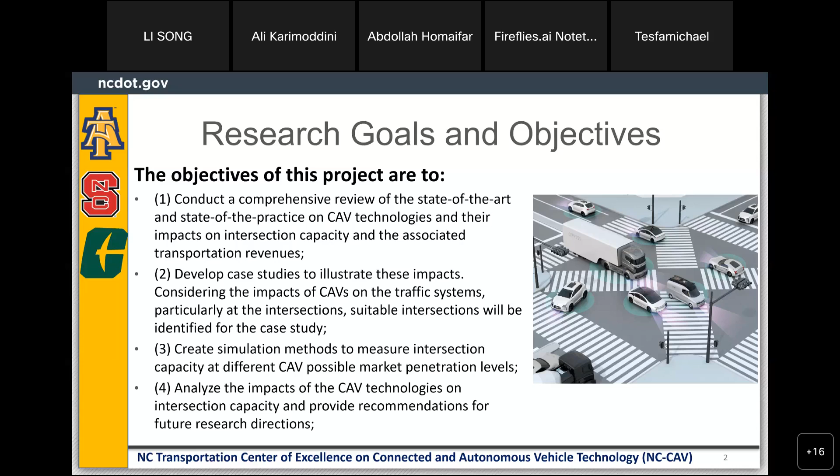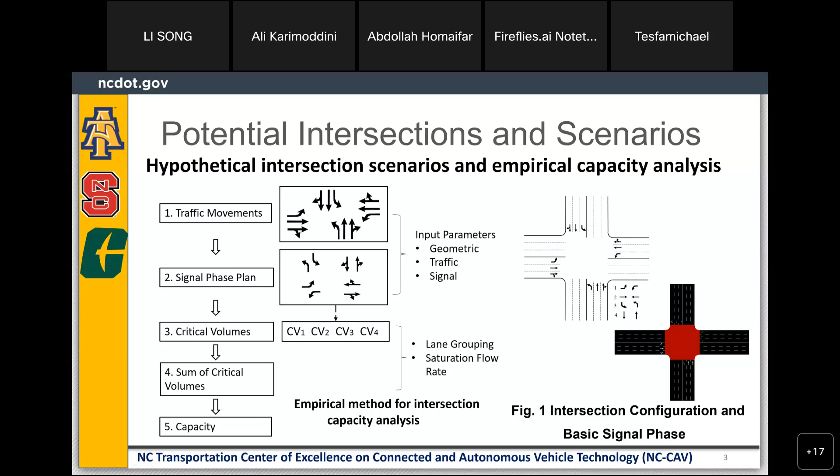And the right figure illustrates the layout for the intersection configuration and the basic signal phase for the simulation intersection. Based on the capacity analysis method, we can calculate a pre-timed signal scheme for that intersection, and based on that signal scheme, we can calculate the intersection capacity for the hypothetical isolated intersection, which is around 5,592 vehicles per hour. And this value is set as a baseline for simulation.

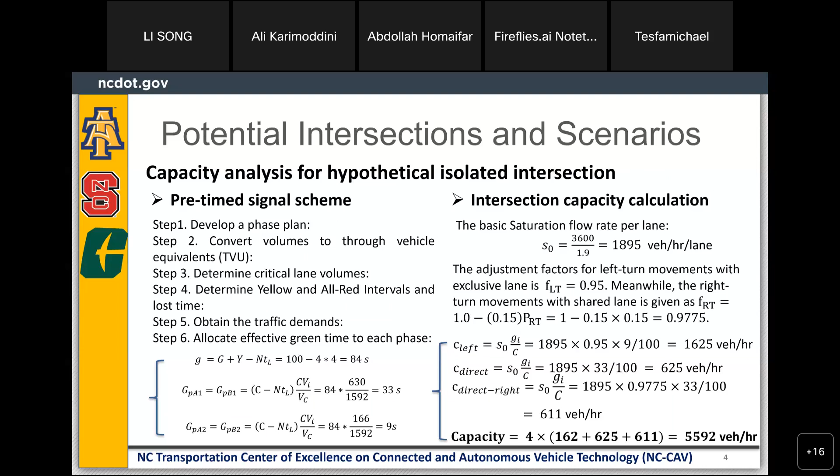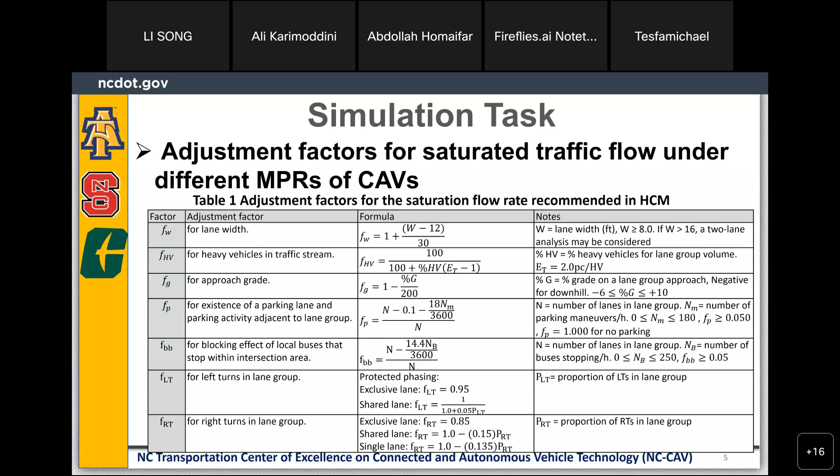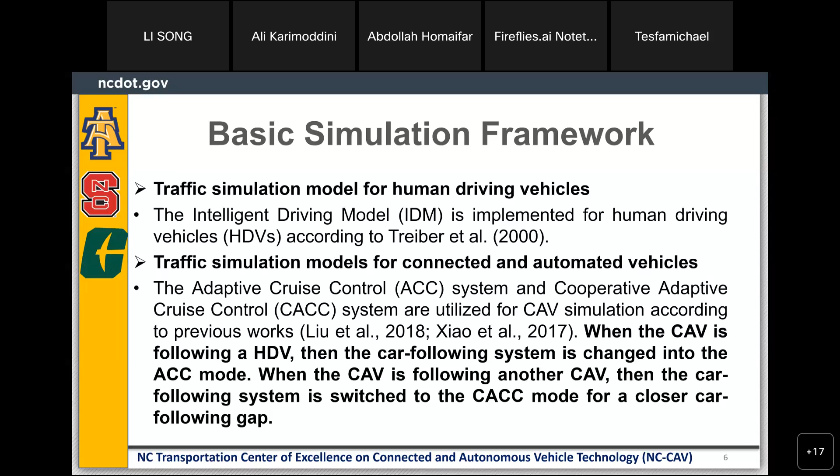In this research, when a CAV is following a human driving vehicle, the car following system is changed into ACC mode. When the CAV is following another CAV, the car following system is switched into CACC mode for a closer car following gap behavior. The basic parameters for the specific traffic simulation models are as follows. The desired time gaps are set as 1.9 seconds for human driven vehicles and 0.6 seconds for CAVs. And we set 1.1 seconds for CAVs with the ACC system, which means the CAV has no front vehicle within the sensor range.

To model heterogeneous driving behaviors of human drivers, the maximum speed for human driven vehicles follows a normal distribution with respect to the speed limit. Other parameters for CACC controlled CAVs are set according to previous research, especially UC Berkeley's PATH program. The default lane change model LC2013 in SUMO is employed for all vehicles. And Table 2 illustrates the basic parameters, including the acceleration, deceleration, desired time gaps, speed deviations, and minimum following gaps for different kinds of vehicles.

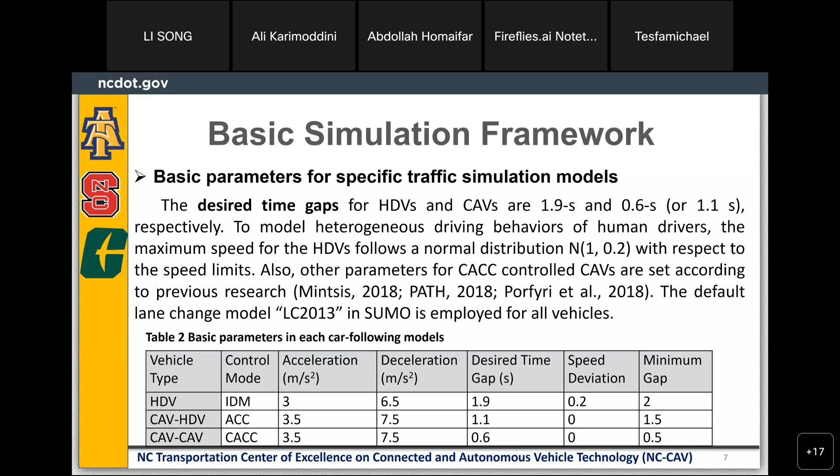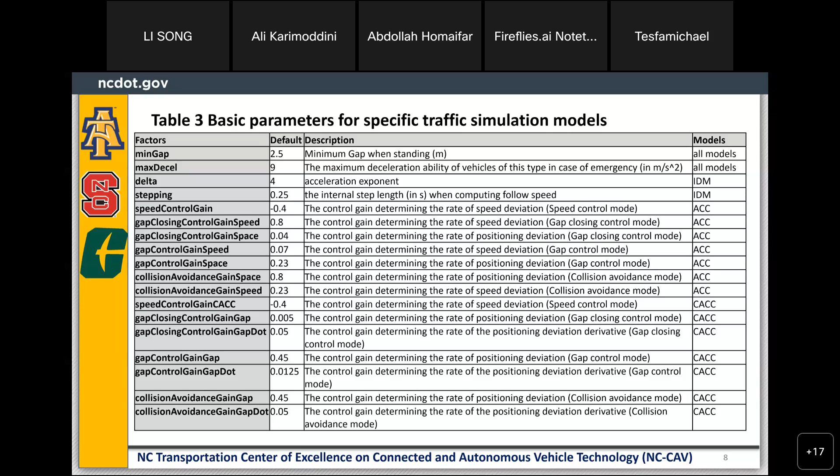With the baseline settings for simulations, we also create specific scenarios for the simulation. The first one is for the lane group level analysis. As defined in the Highway Capacity Manual, the saturation headway is the average headway between the 5th and the 15th passenger vehicles in a standing queue when the intersection signal changes from red to green. The first 4 headways are not included due to the start-up lost time.

The headway is calculated by the time gap between 2 successive vehicles, meaning the front bumpers of the vehicles passing over the stop line, which is illustrated in the left figure. And we can also calculate the saturation headway considering the start-up lost time, which is illustrated in the right figure.

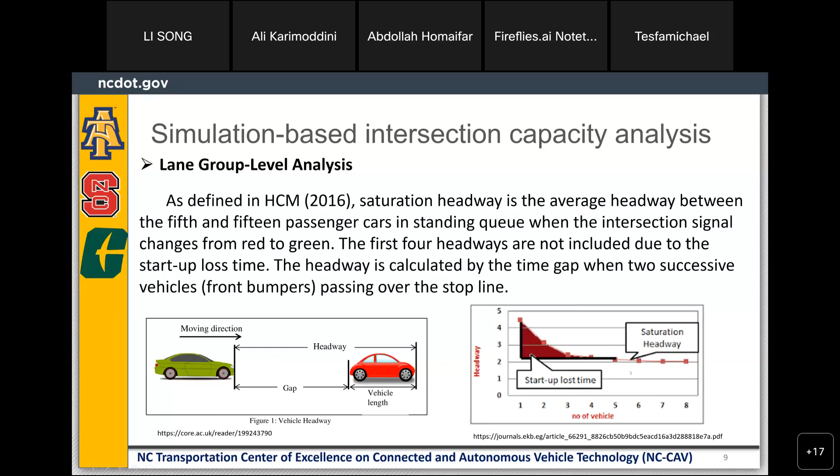With the baseline settings for the simulation scenarios, we can first calculate the saturation headways for each lane group at the intersection during the simulation. Table 4 illustrates saturation headways for each lane group, where we can observe different saturation headways under different market penetration rates of CAVs. For example, for the exclusive through traffic lane, we can observe a decrease in the saturation headways with the increase of the market penetration rate of CAVs.

Also, for CAVs with the ACC or CACC mode, we can calculate the gap based on the right formula, and we can also calculate the gap for human-driven vehicles in the IDM mode based on the right figure.

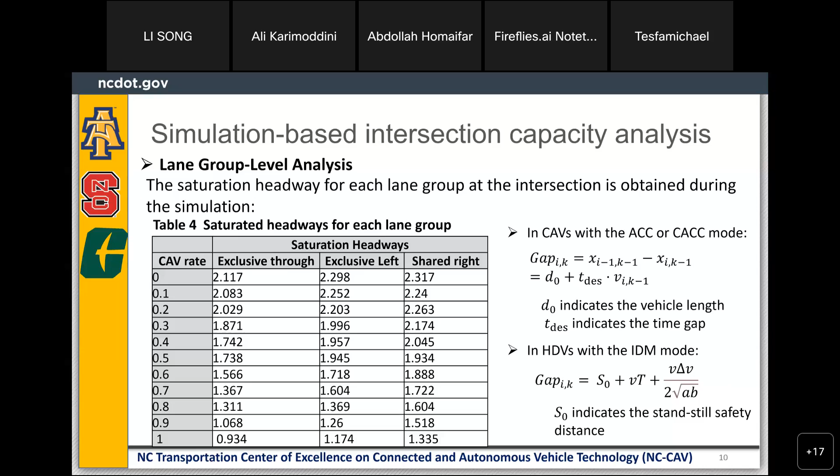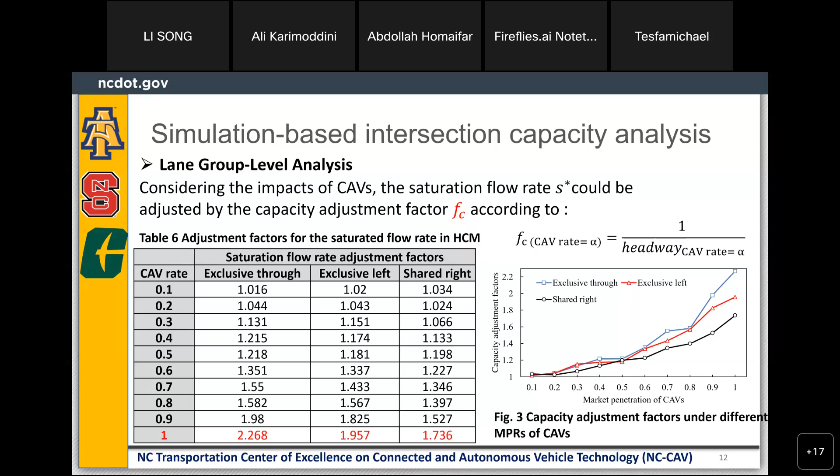The tendency of the capacity adjustment factors for the exclusive through, exclusive left, and shared right turn lanes is observed in Figure 3. After calculating the adjustment factors for the specific lanes, we can also do an intersection level analysis, which means that we calculate the adjustment factor for the whole intersection.

The simulation maximum throughput, which is identified as the maximum capacity of that isolated intersection, is obtained with the increase of the traffic demand under different market penetration rates of CAVs. This means that with the increase of the traffic demand, in the simulation we can observe a steady increase in the throughput at first.

After a certain volume, we can observe the saturated traffic at that intersection, and that maximum volume is set as the maximum throughput, which is also identified as the capacity of that intersection.

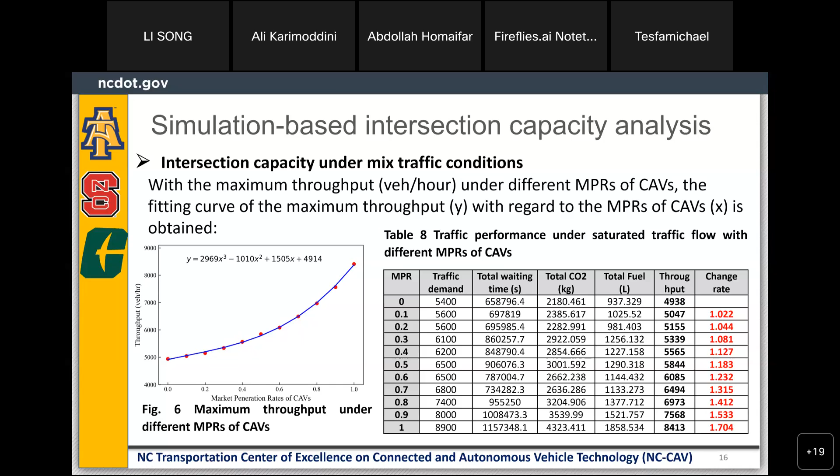With the increase of the market penetration rate, the change rate also increases, which means that the throughput increased steadily. And with 100% market penetration rate of CAVs, we finally observe a change rate of about 1.7, which means a 70% increase in the throughput with regard to scenarios with only human-driven vehicles.

After doing that, we also calculate and present the fitting curves of other performance criteria with regard to different market penetration rates of CAVs, which include the cumulative carbon dioxide emissions, the cumulative fuel consumption, and the total waiting time for the whole intersection. We also observe the average carbon dioxide emissions, fuel consumption, and average waiting time under different market penetration rates of CAVs.

It is observed that with the increase of market penetration rate of CAVs, a decrease in the average values for the carbon dioxide emissions, the fuel consumption, and the waiting time is observed.

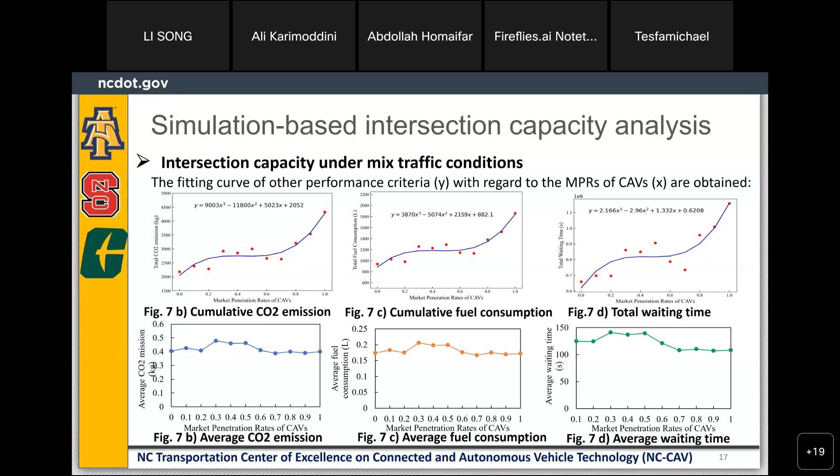After that, we also investigate the impact of CAV penetration rate on the intersection with fixed traffic demand, which means that in these simulation scenarios, we fix the traffic demand and then consider variations in the market penetration rate. The hypothesis of these scenarios is that the impacts of CAV penetration rate are different under different demand levels.

For example, in Figure 7, we can observe and calculate the maximum throughput with 100% human-driven vehicles. And in scenarios with 100% market penetration rate of CAVs, we observe that the maximum throughput increased to 1.7, which means a 70% increase in the maximum throughput.

By getting these two different maximum throughputs, we want to test the impact of CAV penetration rate with the increase of the demand levels from 0 to the capacity with only human-driven vehicles and the capacity with only CAVs.

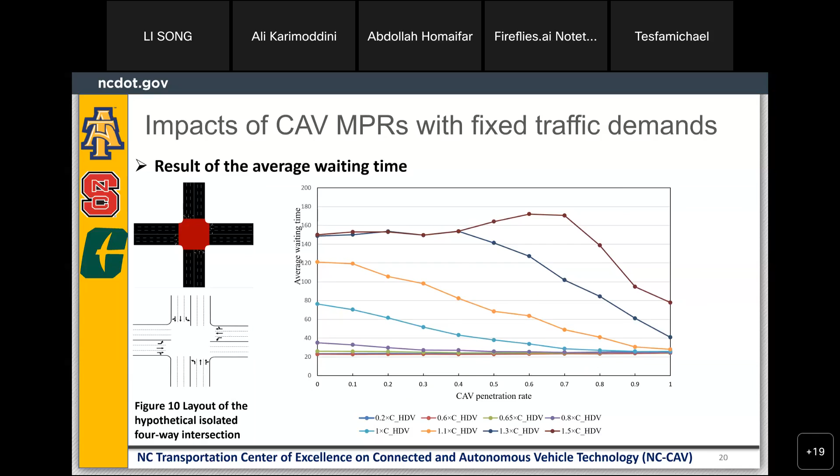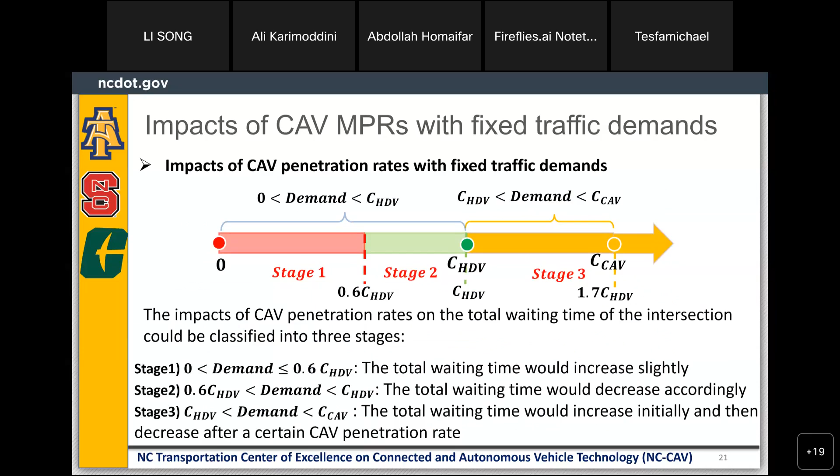In summary, for that hypothetical four-way intersection, we can segment the traffic performance into three different stages. For the first stage, stage 1, with the traffic demand under 0 to 0.6 multiplied by the capacity of human-driven vehicles, the total waiting time would increase slightly, which means that we cannot observe a significant impact of CAVs under that scenario. And only when the traffic demand for the intersection is between 0.6 capacity of human-driven vehicles and 1 multiplied by the capacity of human-driven vehicles, the total waiting time would decrease accordingly. Which means that with the increase of CAV percentage, we can observe a steady decrease in the total waiting time.

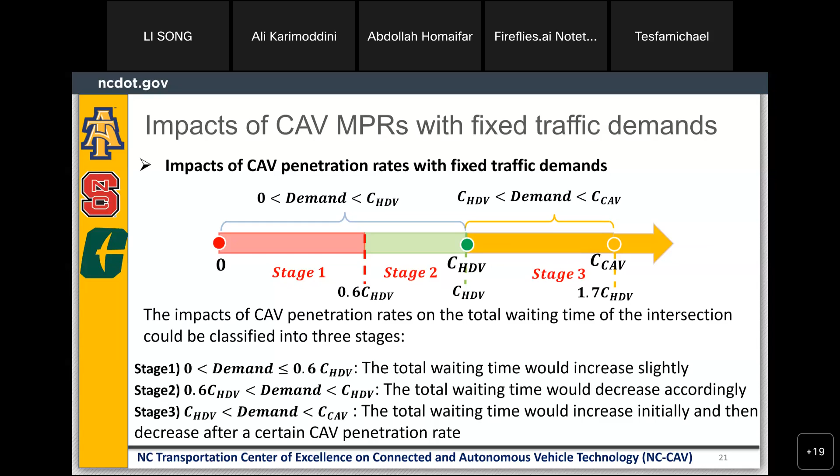And when the traffic demand is oversaturated, which means that it is larger than the capacity with only human-driven vehicles and also less than the capacity of only CAV vehicles, the total waiting time would increase initially, which means that at the first stage the traffic will be oversaturated, and only after a certain market penetration rate can we observe a decrease in the total waiting time.

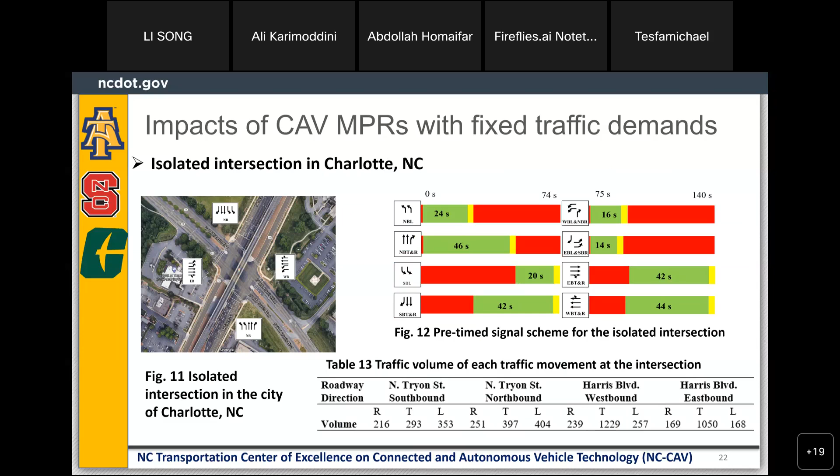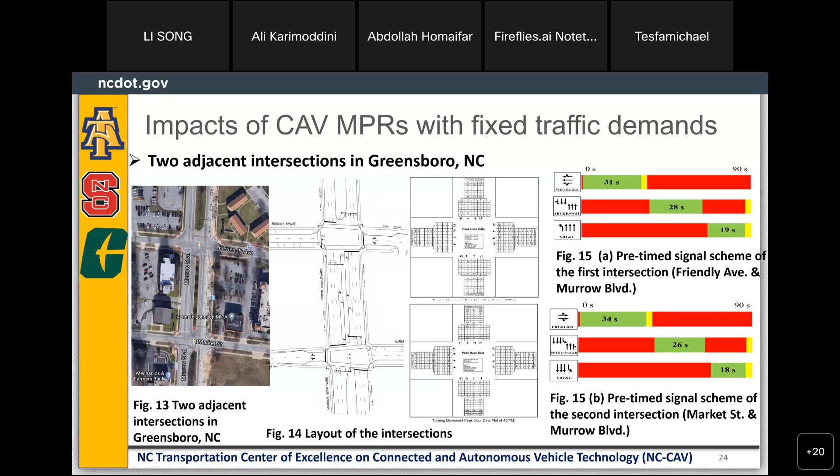And also we test the traffic performance at two adjacent intersections in Greensboro, North Carolina, whose layout is shown in the middle figures, and the right figure identifies the pre-timed signal schemes of the first intersection and also the second intersection. With all that as the input for simulations, we can test the traffic performance under different traffic demands. For the first one, we can observe that the traffic demand is very low, so with the increase of CAVs, we observed a slight increase in total waiting time.

For that case, we double the traffic demand and test the total waiting time performance. At the first stage, we can see oversaturated scenarios, and only after 60% CAV penetration rate can we observe a decrease in the total waiting time, which means that total waiting time would increase initially and then decrease only after a certain market penetration rate, which is also very close to the hypothesis, stage 2, stage 1 and stage 3.

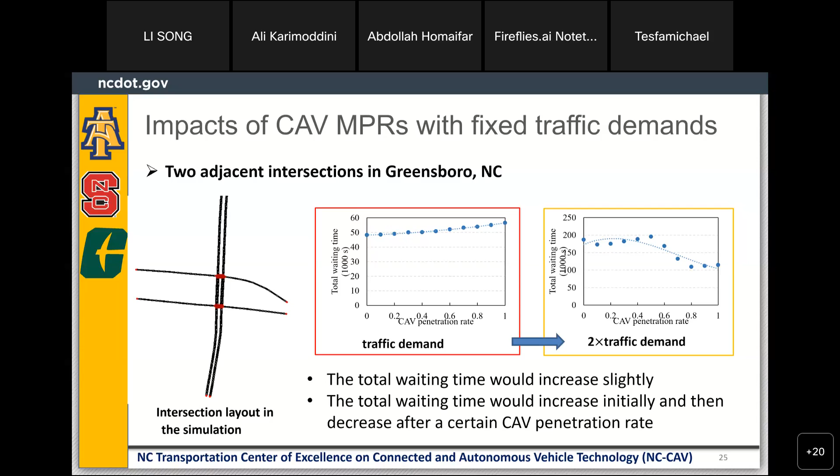That's all my presentation today. Thank you for listening. Any questions and suggestions are all welcome.

Thank you so much. So, any questions?

So, while others are getting prepared for the questions, I do have one question. You might have already mentioned it, but it could be helpful if you can remind us again. Out of all these scenarios that you were discussing, what was the best scenario or best situation that you saw, where you can gain the most for increasing the capacity of the intersection? Which sort of scenario do you think might be providing the most capacity?

So that's a very good question, and what I want to say is that when the traffic demand for that intersection is not larger than the capacity with only human-driven vehicles, then we can observe a steady decrease in the total waiting, which means that the capacity will increase steadily. And for the hypothetical intersection, we can observe about a 70% increase in the capacity.